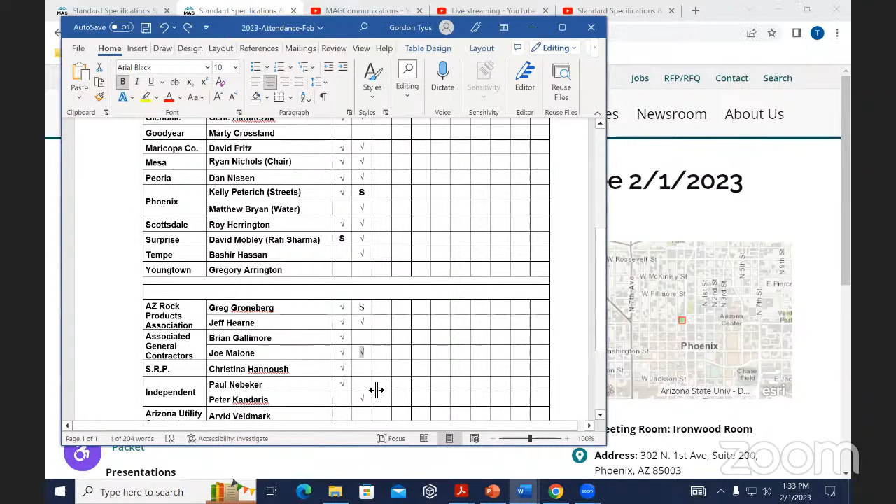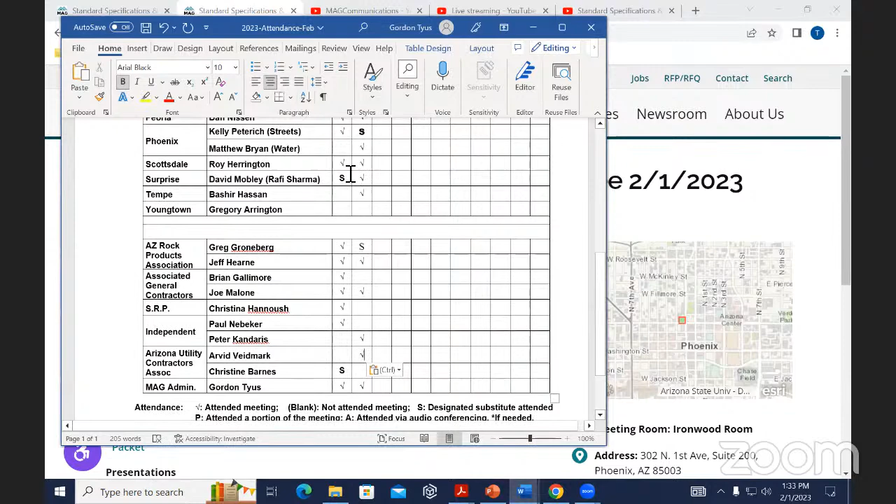Okay. Gordon has the roll call sheet up and shows who is present. If you don't see that your name is checked and it should be, let us know. Hi, this is Arvid Veidmark. Arvid, thank you. 2841. It's a cell phone. Marty Crossland with Goodyear's on as well. Marty.

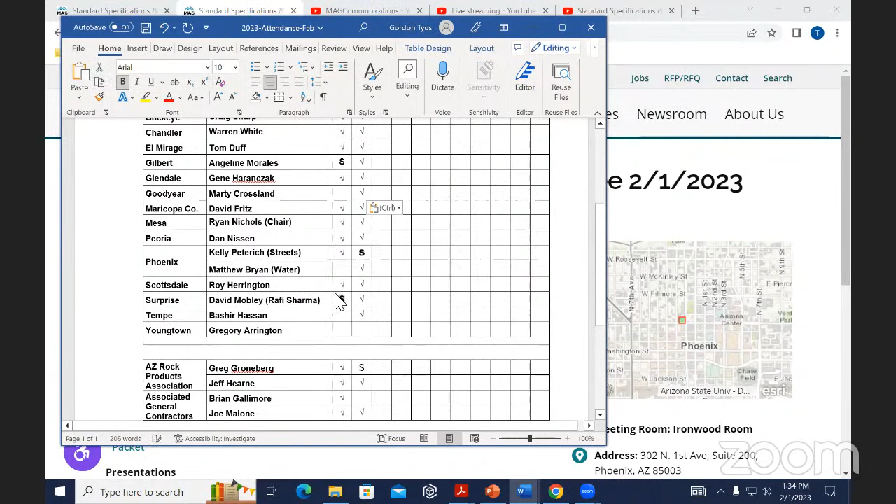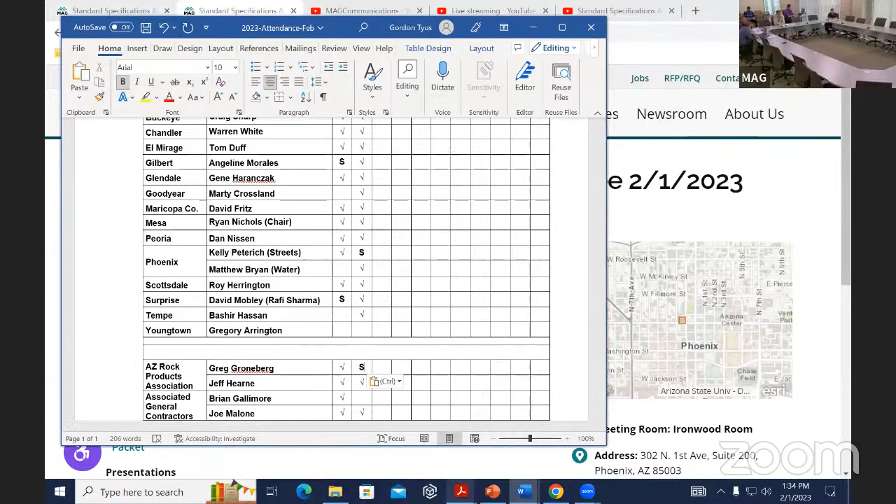Okay. Thank you everyone for joining our meeting today. With that, I don't think we'll go through specifically and do introductions of everybody today like we did last month. However, we do have a few people visiting with us today. We'll ask them if they can give a quick introduction. Hi, my name's Gary Kirk with Cal Portland Cement. Gary also has Sydney Wilson here with him from Cal Portland Cement. Okay. We have Mark Milani and Teresa Coleman also from Drake Cement. Those are the three cement producers in the state of Arizona. Fantastic. And they all came today. That's fantastic. All right. And our support.

Okay. Very good. And today, David Mobley, are you on today? David? Oh, there I am. Can you hear me now? I hear you have some news for us. Yes. So today will be my official last MAG meeting. I am actually retiring from the city of Surprise at the end of the month. Well, congratulations. And from what I understand, you've been on the committee for about 7 years now. Yes. Well, we appreciate all the time that you've had on this committee. That's actually quite a long time, more than most of us.

And appreciate all the time and effort that you've put into the committee, the subcommittee meetings that you've participated in, and of course throughout all these years, all the value you've added to each of the cases, and wanted to recognize that and thank you for that time and service. Well, thank you. It's been a fun time. I'm glad to be a part of it. And Rafi will be taking over full time for the rest of the year. We'll get the paperwork submitted to Gordon for that. But yeah, thank you guys for allowing me to be on it. It was fun. I enjoyed it.

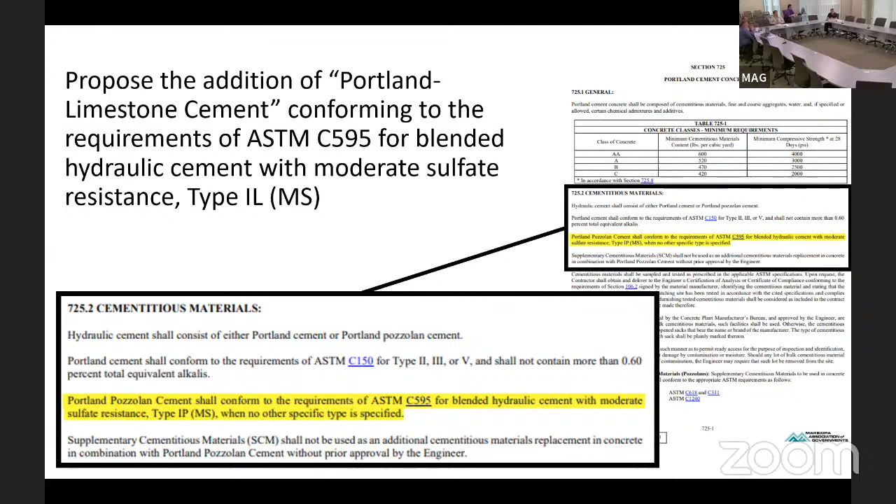So about ASTM C595 cement. ASTM C595 cement is a cement that has been recognized and become very popular lately. There are 4 designations under ASTM C595: an IL interground limestone, an IP interground pozzolan, an IS interground slag, and a 1T, which is a ternary. The ternary is a combination of 2 of the 3 SCMs, either the slag, pozzolan, or limestone. The reason for the popularity is it's a lower CO2 cement, so the carbon footprint is lower due to these replacement levels of clinker with these SCMs, which give you a significantly lower global warming potential on your EPD.

So currently, go back one slide. Currently here, this is what you guys currently accept. You accept a pozzolan Portland cement C595 IP. Our goal here is to get the addition of the IL and the IT. We'll go through all these cements here.

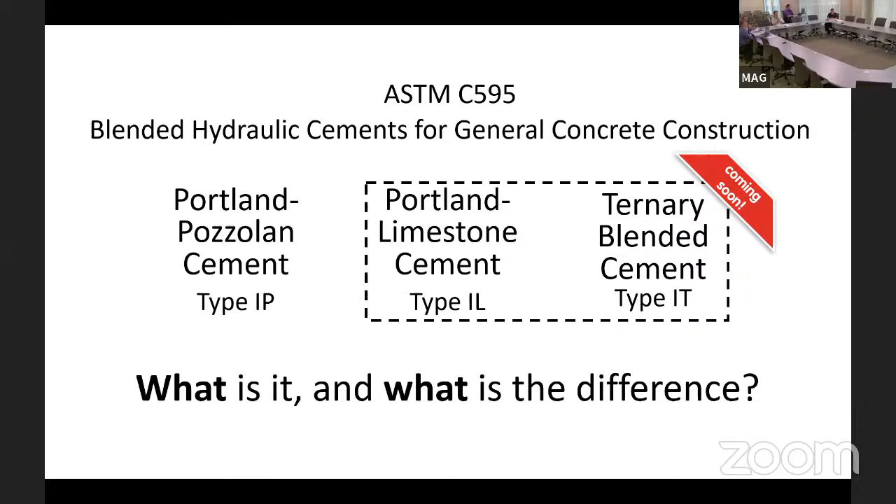So what is a Portland limestone cement? It's a blended cement, ASTM C595. It has a minimum 5% limestone to a maximum 15% limestone. Similar to ASTM C150 cement, which is also known as OPC, but OPC C150 cements have a maximum of 5%. So this just picks up with a higher replacement, giving you that enhanced lower CO2 footprint.

The Portland limestone cement would be considered IL under the C595 designation, and limestone and sulfate resistance are going to be reported on the mill cert. So here's an example: on a mill cert it would be a type IL(13)(HS). The 13 in parentheses would designate the percent limestone in the cement, and the HS would designate it's high sulfate resistant.

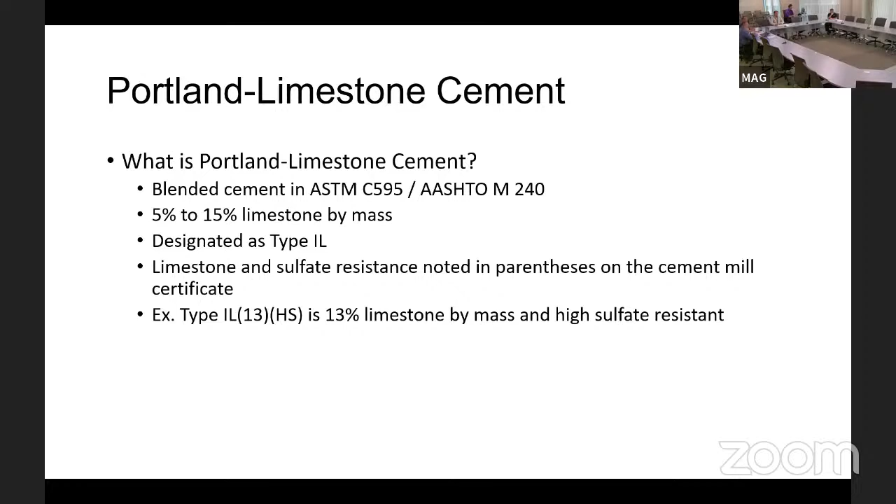So the clinker is the product that comes out of a kiln. You put raw feed that's been targeted for calcium, iron, silica, and alumina into a high burning kiln at 3,000 degrees Fahrenheit.

What happens during that high temperature is you get what they call calcination. So you're releasing carbon dioxide. So the CO2 is going out the stack, and you're turning limestone, calcium carbonate, which has a chemical makeup of CaCO3. When you're shedding the CO2, the carbon dioxide, you're turning CaCO3 into CaO, which is lime.

So this lime is getting molten, connecting, configuring with the other oxides that are inside the kiln, and you're getting your target properties that you need for cement chemistry: tricalcium aluminates, tricalcium silicates. This is what gives you the properties to have a hydraulic cement, so something that's going to react and hydrate when you introduce water to it to begin the stiffening, hardening process of concrete.

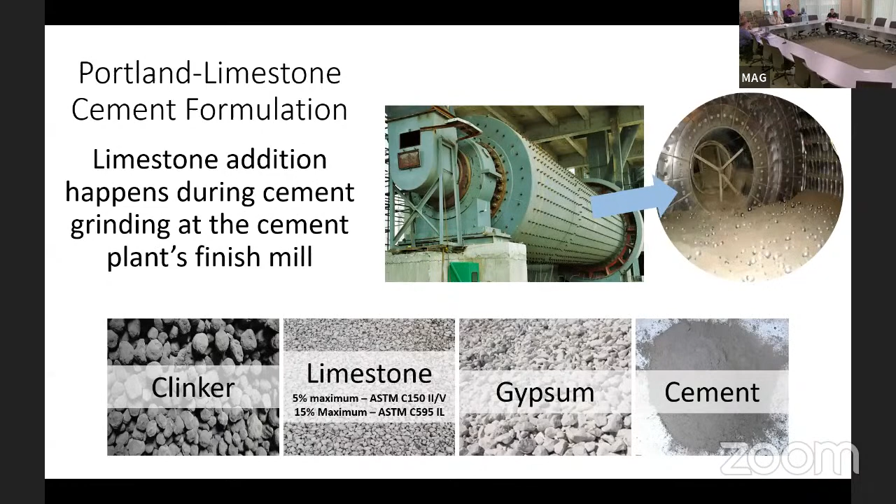A ternary blend is also a C595. It's any combination of the following. You could have two blended pozzolans. Pozzolans could be a natural pozzolan and a fly ash, or you have limestone and pozzolan, pozzolan and slag, limestone and slag. It's designated as the IT. Sulfate resistance and pozzolan, limestone, slag content noted in parentheses are also reported in a mill cert. So an example here is a IT P10 L10 HS. It's basically a IT cement with 10% interground pozzolan, 10% limestone, and it's high sulfate resistant.

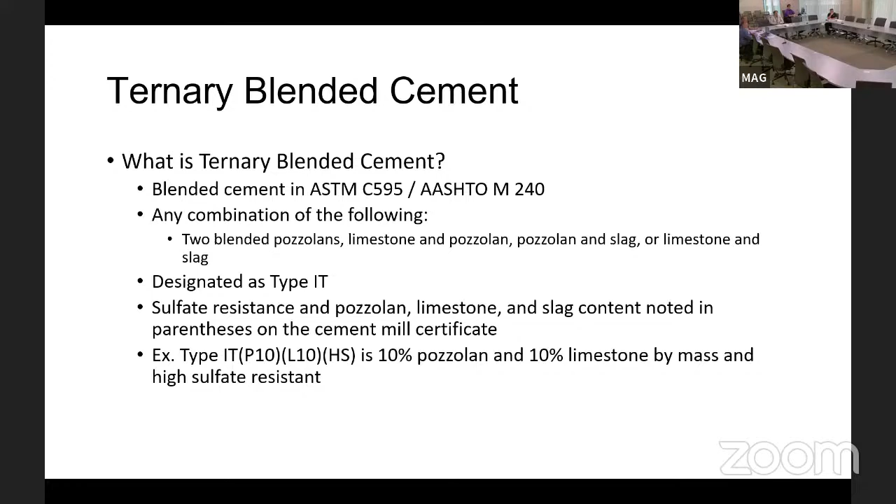Again, back to this slide here, same process, same materials, other than limestone. Now you're introducing either a pozzolan or a slag. Clinker is considered one of the products. So you've got clinker, limestone, and your third would be pozzolan or slag. Gypsum, again, is introduced to regulate set time, and you end up with an end product of cement that performs the same as ASTM C150 II/V or the C595 IL.

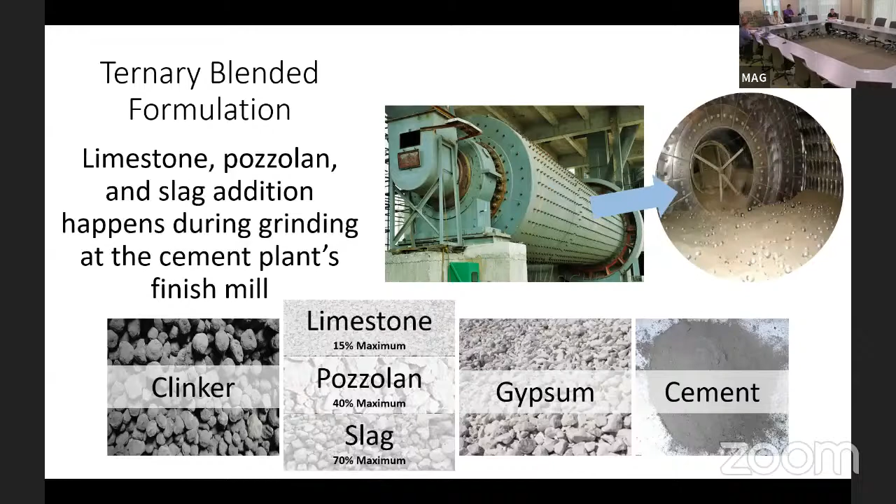Here's a better visual. You have 4 tables here going through. It's all about the clinker factor. You see C150 has the highest percent clinker. And these limestone, pozzolan, and slag are considered what they call SCMs, supplementary cementitious materials. They have lower CO2 content and GWP weight than clinker. So whenever you're reducing your clinker, you're getting a cleaner cement, a lower CO2 carbon footprint.

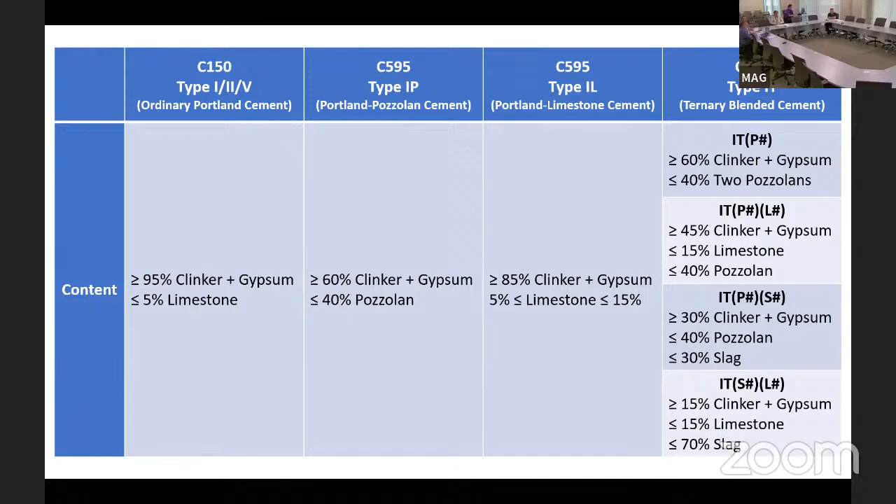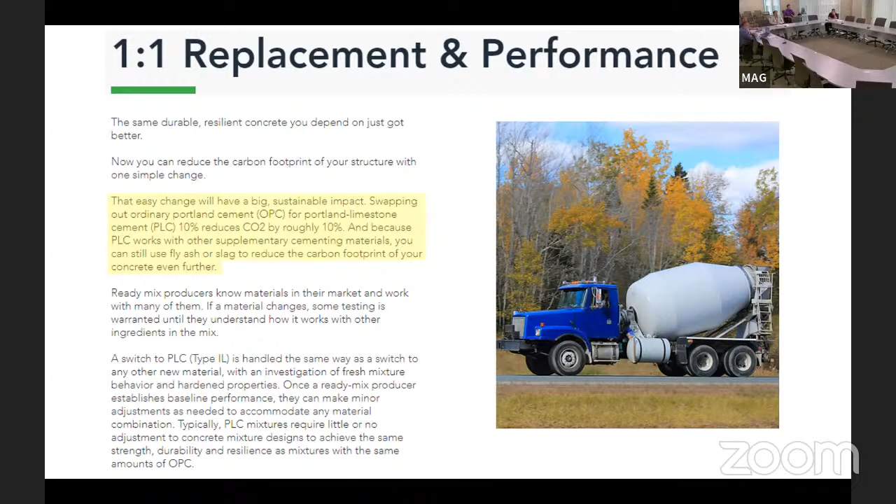Here's a slide from greenercement.com. This slide just reiterates that the performance is comparable on a 1-to-1 basis with ASTM C150 cement. So that would mean on a typical mix design, a pound for pound replacement, and you get comparable performance. Tested and proven. It's been used for years, decades, for paving projects, and we'll get into that with the OSU report, which is a really in-depth deep dive on the comparison with the II/V.

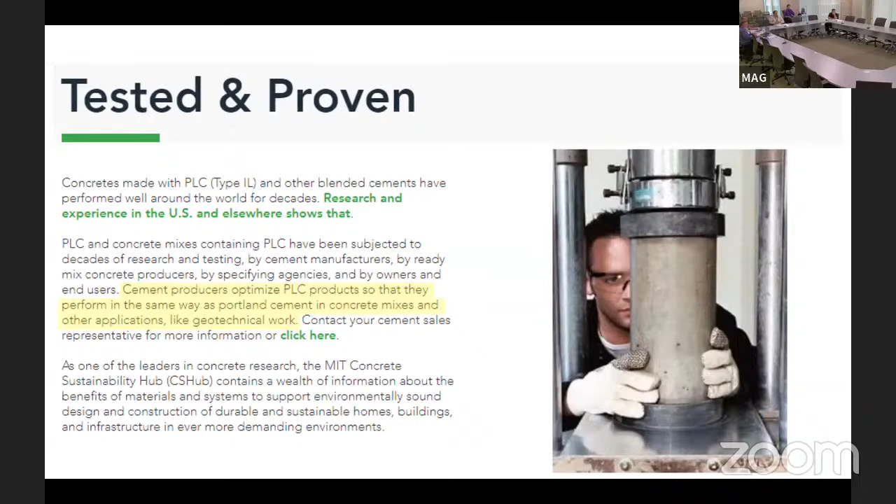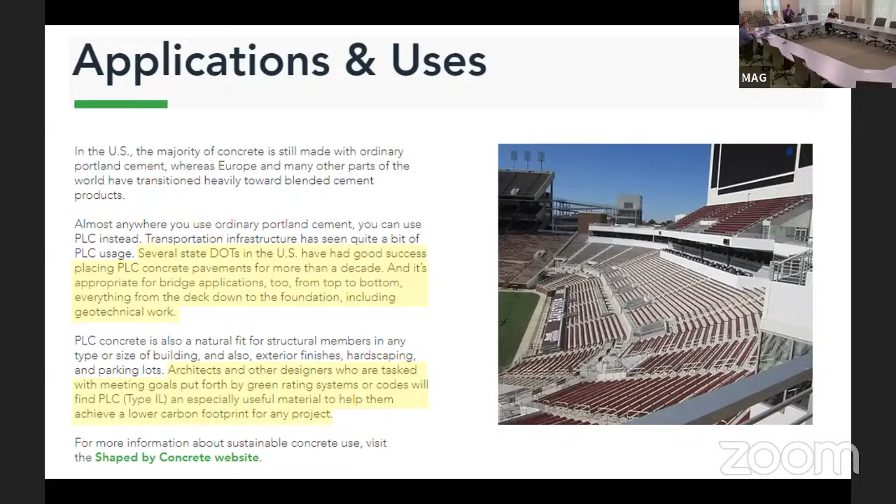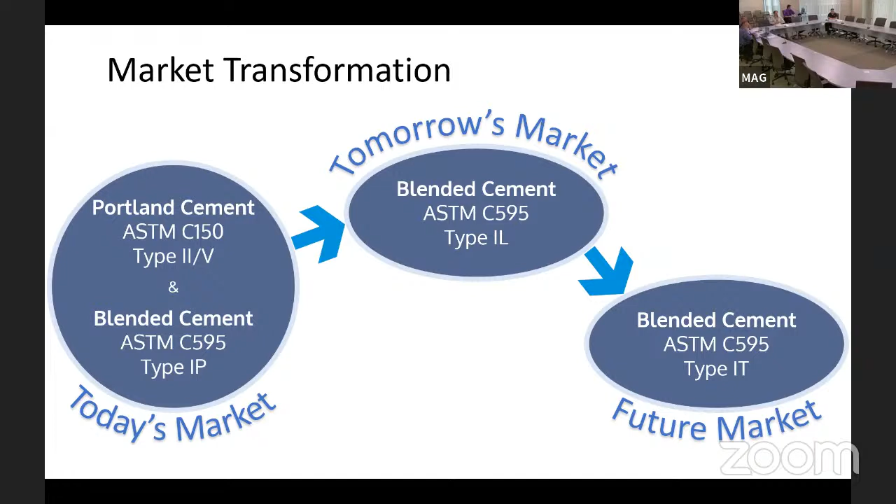Another example of applications and uses: pavement, bridges, foundations, decking, high sulfate, moderate sulfate, slab on grade. It's comparable for any type of application that type II/V is currently used on. Here's a good visual: currently you guys are allowing ASTM C150 type 2 moderate and type 5 high sulfate, as well as a C595 IP cement. Our goal here is to hopefully get the addition of the ASTM C595 type IL cement and the ASTM C595 type IT cement. Comparable performance, lower CO2.

So the research. Caltrans and OSU did a 3-year study on the impact and use of Portland limestone cement on concrete performance in plain and reinforced material. This study was performed by Oregon State University. Dr. Jason Weiss headed the study. Next slide, please.

Some of the topics examined, as I was saying, it's in depth. I think it's 321 pages of research, but they went through ASR, alkali silica reactivity, shrinkage, strength, transport, chlorides, chloride ingress, corrosion, air entrainment, sulfate attack, construction schedules, greenhouse gas emissions. It's just very detailed.

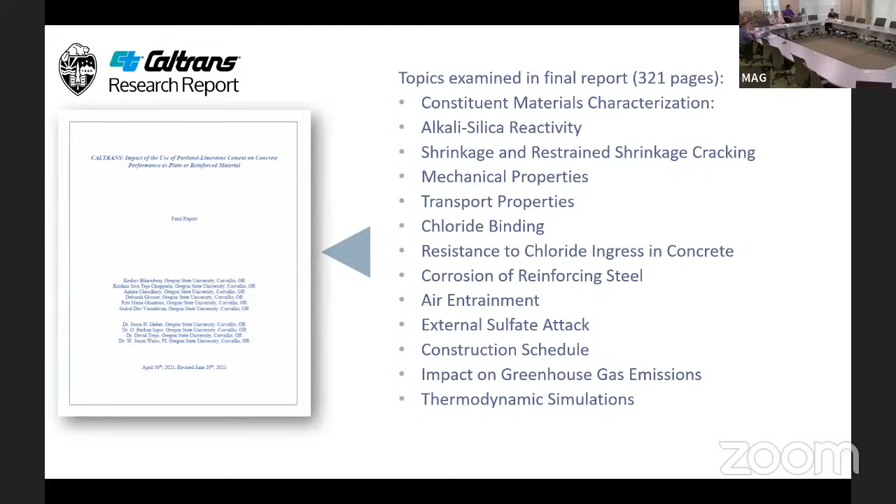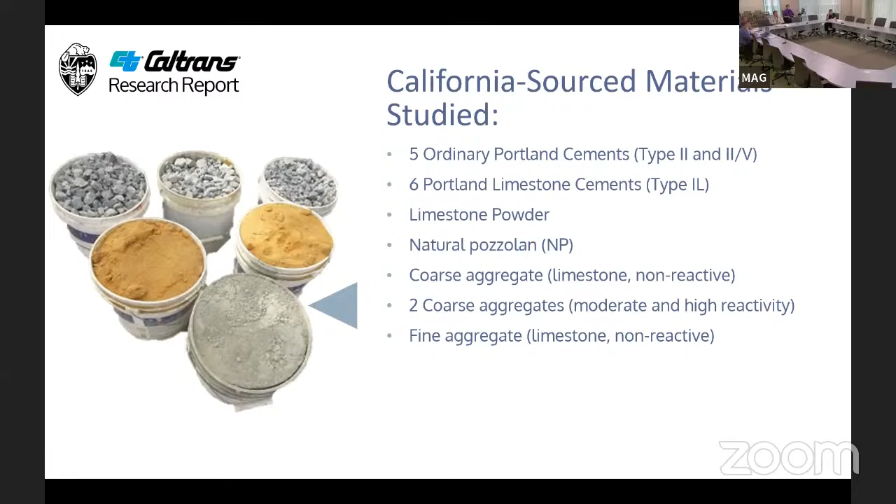All the cements for the Caltrans study were locally sourced out of California. They obtained 5 OPC cements, some type 2, some type 5, 6 PLC cements. I believe they had 2 different levels of limestone replacement, as well as a limestone powder and a natural pozzolan. And they additionally had both coarse and fine aggregates that were moderate and high reactivity and non-reactive. So the full gamut. And they did lots and lots of concrete and a lot of tests.

One of the final takeaways on the report was, when Portland cement is replaced with Portland limestone cement, you get a 10 to 12% average greenhouse gas reduction. And this 10 to 12% greenhouse gas reduction can be further lowered if, say, at a batch plant or a direct job, they're trimming the cement content even lower with further replacement of fly ash or pozzolan or slag.

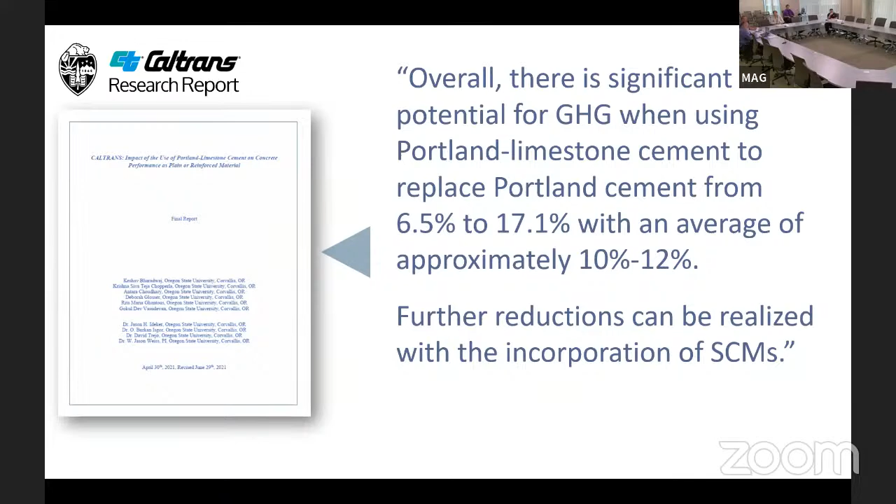Another major finding: PLCs can be used as a direct replacement for OPC. PLC can replace OPC in systems containing SCMs, with synergies with alumina improving performance. They found that the PLC interground limestone, when used with slag as an SCM, had a higher degree of carboaluminate growth, which gave better strengths and less permeability to the concrete. And they recommended that specifications that permit the use of OPC could also permit the use of PLC, again at a 1-to-1 replacement.

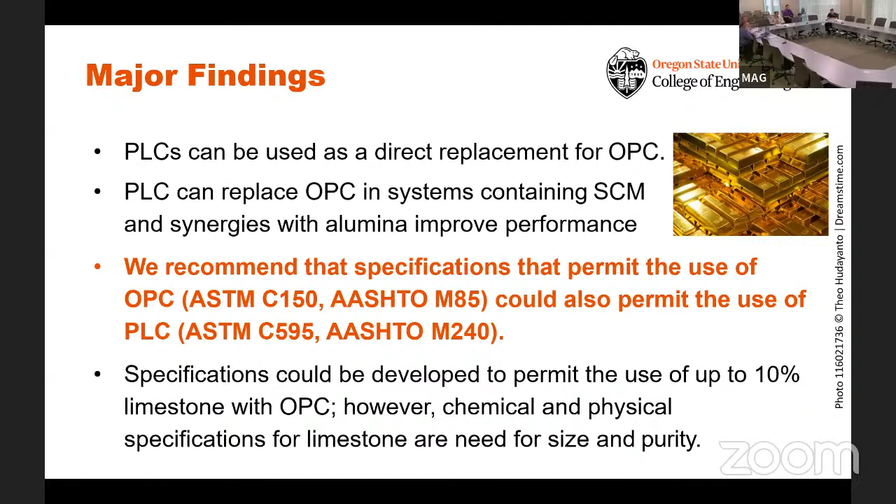So who approves of type 1L cement? Caltrans, after the completion and reporting of the OSU report from Jason Weiss, decided to make a complete shift over to PLC, and Caltrans currently allows for Portland limestone cement on all new projects. And at the time when they did this last year, they allowed for switching over to PLC in the middle of a project. So it was Caltrans, NDOT, and ADOT. They were kind of the holdout here on the West Coast for the last couple years. And this report from Jason Weiss got Caltrans to move the needle for approval.

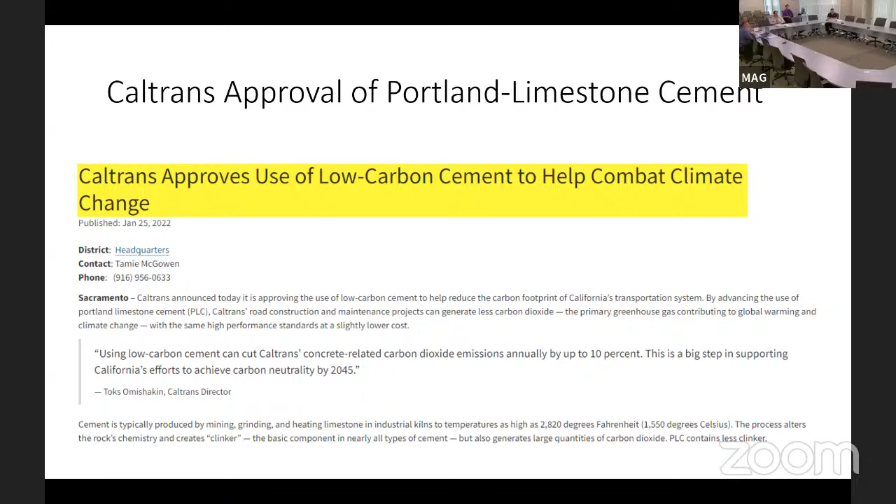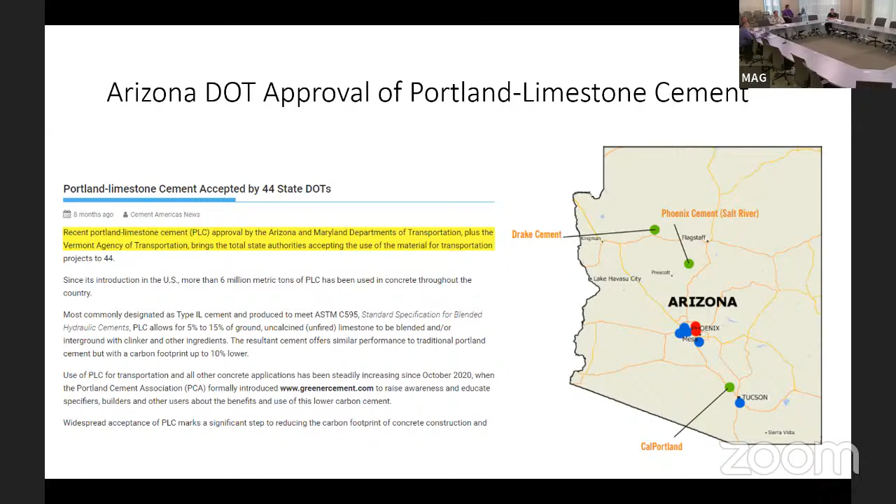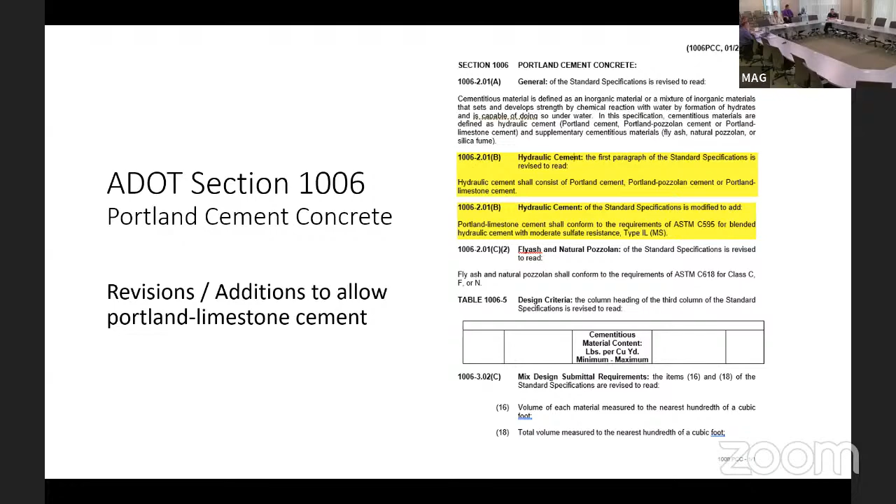Shortly after Caltrans approved, NDOT followed suit and also approved Portland limestone cement. And also shortly after NDOT, ADOT approved. And so ADOT is accepting PLC for all DOT work. And here's a map that shows the geographics of CalPortland, Drake, and SRMG in Arizona. Here's a picture of the ADOT section 1006 Portland cement concrete. You can see the highlighted version there that shows the inclusion now of ASTM C595 1L cement, moderate sulfate. Very similar verbiage to what we're asking for MAG to accept today.

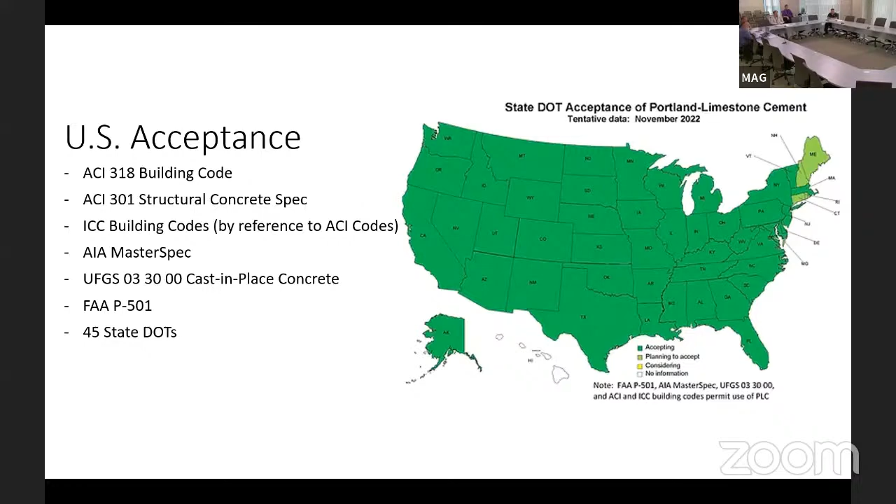Here's U.S. acceptance. Changes have been made to the American Concrete Institute building codes. ACI 318 allows 595 for structural, as well as 301. ICC, AIA, Corps of Engineers, FAA, and 45 of the states currently accept. 4 of the 5 are very close to accepting, all kind of up in the northeast corner.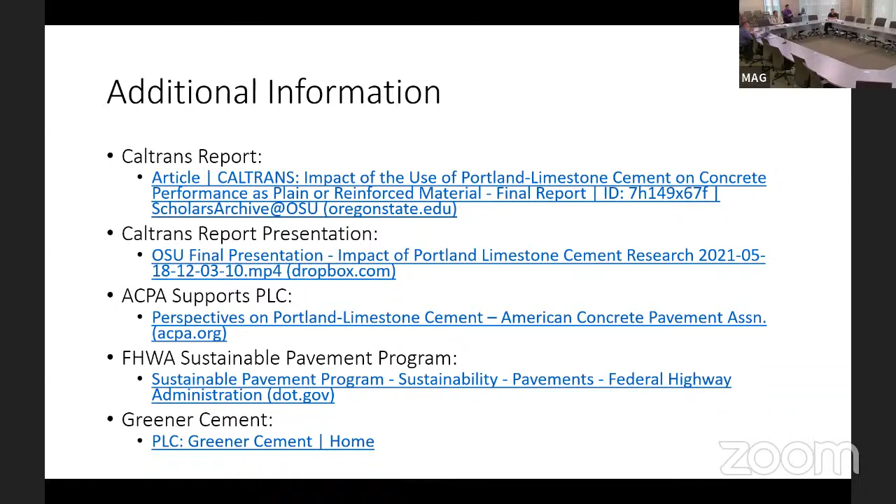Here's a slide that shows some of the information, the Caltrans report, and then the Caltrans presentation, which won't take as much time to read. It's a little condensed. We also had the American Concrete Pavement Association, the Federal Highway Administration, and the Greener Cement website, from which we included some of the slides in the presentation today. That concludes the presentation. Thank you.

Gordon, did we have any questions from raised hands so far? Okay, well, we'll go ahead and open it up here for questions from the committee for this presentation.

Somebody, I've got a lot of questions, but I'm waiting for everyone else. I know other people must have questions. I think it was just a great presentation. It was a great presentation, and I think everyone on here is smarter than I am, so maybe they caught it all, whereas I have to clarify some things. Looks like Dan's got a question.

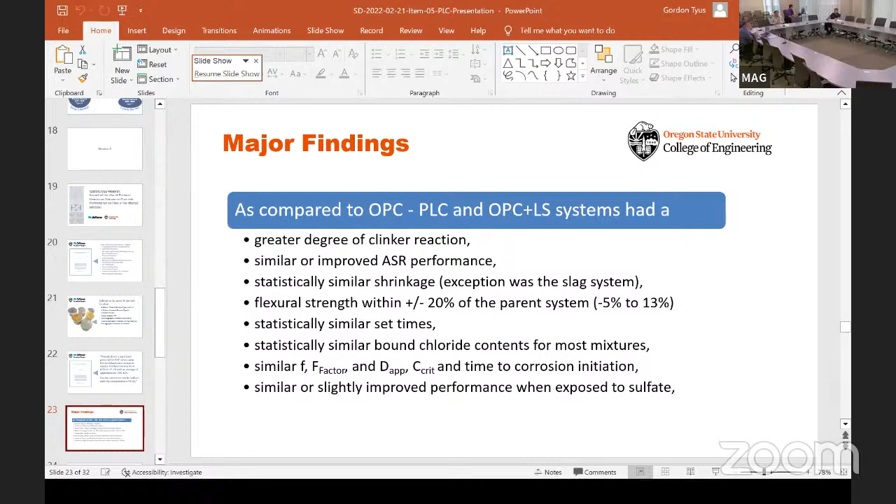Yep. So flexural strength is with paving. It's a beam that is heavily dependent on aggregate more than cement paste. For instance, smooth river rock does not perform well with the flex beam. You need a crushed aggregate to get better adherence, so you don't have that pull out. Flexural strength was plus or minus 20 of the parent system. I'd have to dig into the Caltrans to see if it was plus or minus.

Okay, I was just curious. I'm assuming Caltrans and ADOT have probably taken a pretty close look at this as well, so if there were issues they probably would have raised those. I think this was the one that could have been possibly plus. I know Caltrans requires high replacement of SCMs in addition to PLC and with OPC.

The other thing is the OSU study tested a range of limestone contents, as you can see, from 5 to 13%. So this is a generic statement that incorporates that range of materials. I think you're going to find the vast majority of 1L PLC products will be around that 10% number. It really doesn't make much sense to produce a PLC with only 5 or 6%, because that's C150 cement. That's what we already have. We really need to get to that 10% number before it makes much sense to do it.

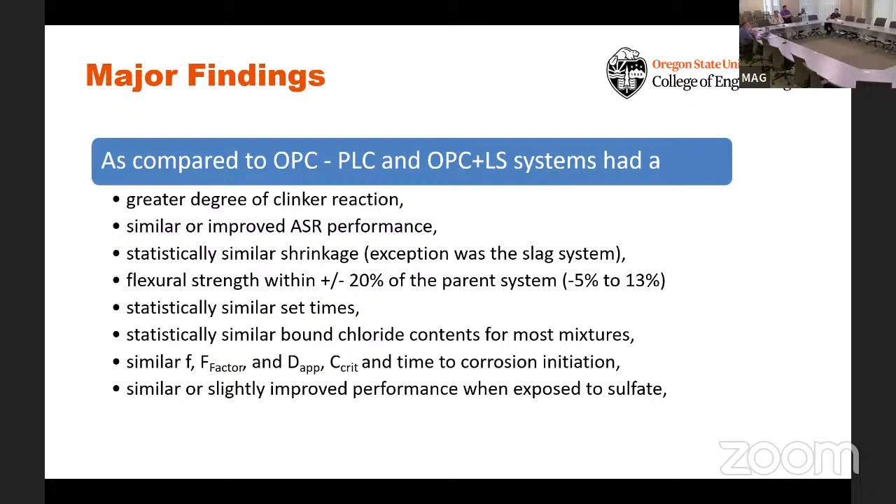So this is a kind of generic statement that would incorporate the larger range. And the studies I've seen from the American Concrete Pavement Association have shown that it gets equal or a little bit better, because of the particle packing scenario, the density you're getting out of the finer ground material. You're filling voids with material rather than leaving those air voids in the materials.

Sure. Yeah, because everything else about it seemed positive. That's why that stood out to me. If the flexural strength was minus 20%, it didn't seem to be in line with everything else. So that was just a curiosity question. Appreciate your time. Thank you.

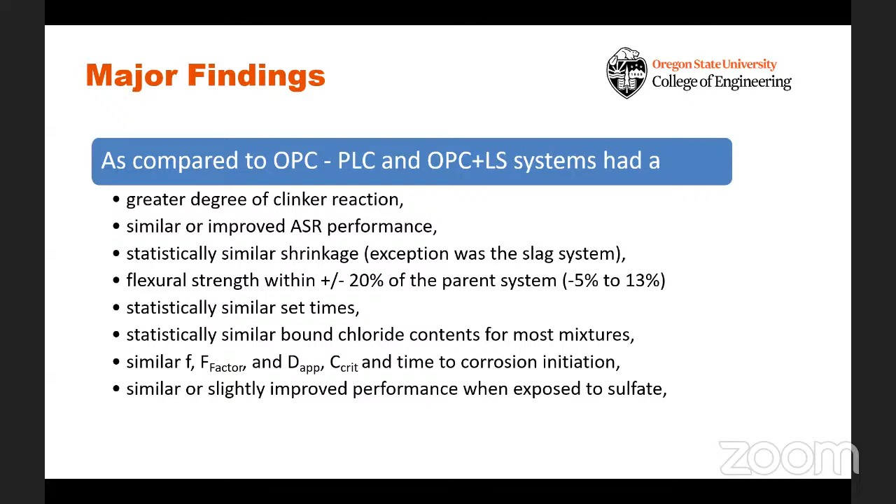Okay, I got a few questions, maybe just one, because I think most of them were answered already. So from what I understood, it's looked at as essentially a 1-for-1 replacement with the standard Portland cement we're using today in our concrete mix design without really changing sulfate resistance, without changing strength, without really any significant property changes.

I think the question was asked earlier if the mix designs would change, and I heard no, but they still might need to tweak them. But my question, just to help me understand: if I took a standard concrete mix design that I have today, for example, City of Mesa has pre-approved mix designs for various producers, and I just swapped out the cement and everything else stayed the same, admixtures, aggregate, water content, would that provide a substitute mix design that would perform equally, or would it still need to be looked at and modified and tweaked?

That's a good question, Ryan. All things being equal, I would say it'll perform the same. Now, having said that, ready mix guys are tweaking their mix designs on a daily basis, reality wise. And that's because of the environments we have in Phoenix, Arizona. We've got 30-degree temperatures at night, 70 degrees during the day. In the summertime, 90 degrees at night, 115 during the day. They're constantly adjusting to get that same performance day in and day out. But all things being equal, side by side, I would say they'll perform.

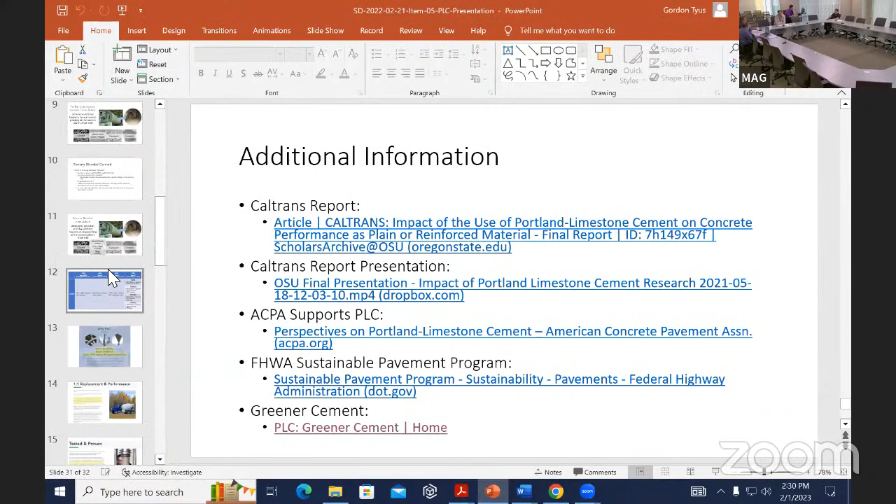My next question is, I saw that on the type 1L in particular, you indicated the maximum limestone content was 15%. Clearly 15% was established for a reason. I'm assuming degradation of performance above 15%, and I guess the question is, if going from 5% to 15% seems to have no negative impacts, what happens after 15% that the performance is no longer found to be acceptable or similar?

There's a graph that's used quite often, with an X and Y axis, and it shows the limestone addition against compressive strength. And the other one is, I believe, a 1202 Coulomb rating for porosity for ingress. When you go up to 4-5% limestone, you get actual strength gain, more strength gain than you do without limestone. And then the opposite is with the porosity.

They cross with the strength. The limestone goes up to about 12.5, 13, and I gotta pull that graph up. But basically it's where they intersect. 15 was the sweet spot where you have the most dense, least permeable concrete, and that's right when the limestone starts to directly hurt the strength. But they do have 20, 30 and 40% limestones in Europe. But we stayed at 15.

This is the beginning, Ryan. This is the beginning. Sure. We will see higher percentages in years to come. It will affect the performance of the cement ultimately. So at 15%, this is where we can have a 1-for-1 swap, but you can still provide a cement at 20 or 30%.

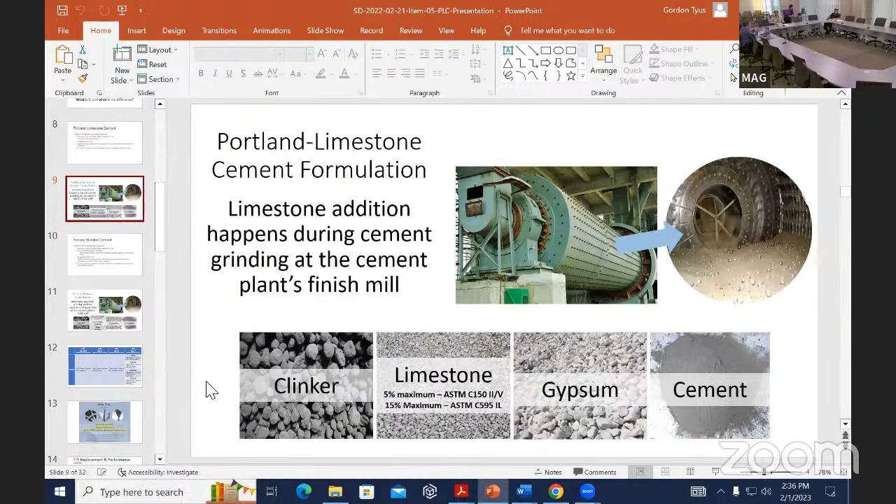A 1T product that would incorporate slag, we're probably not going to see that in the Metro Phoenix area. Availability. But the 1Ts that you will see will incorporate natural pozzolan or fly ash and the interground limestone, because those materials are available right here and we could utilize them.

Now, whether that's at a ready mix plant and those materials are added as standalone single products, or whether that's at a cement plant where those three materials are blended into one product that's used at the ready mix, it's pretty much the same thing.

Yes, slag is a byproduct of steel manufacturing, which is mostly done all in Asia. So they can ship it to some of the ports on the West Coast, but by the time you double handle it, put it in a rail, bring it out to Arizona, and then try to intergrind it at a plant, it's not effective cost-wise. So not today. Who knows what tomorrow brings, right, but not today.

Okay. And Ryan kind of touched on it just a little bit, basically 45 of the states are actually using it now. The upper 5 in the Northeast aren't. Do they have a reason as to why they're not? I'm thinking cold temperature, but then you said they're using it in Canada, so that threw that out. Yeah, I think it might be the Northeast politics. Oh, politics, really?

I know that those things never come into play in the real world, but it's my understanding, our understanding, because we sit in on the national calls that we have of people all over the countryside, Portland Cement Association, who are working on these things, it's our indication from them that it's not because of performance of the product. Just a slow process. Well, change resistant. We understand that very clear here.

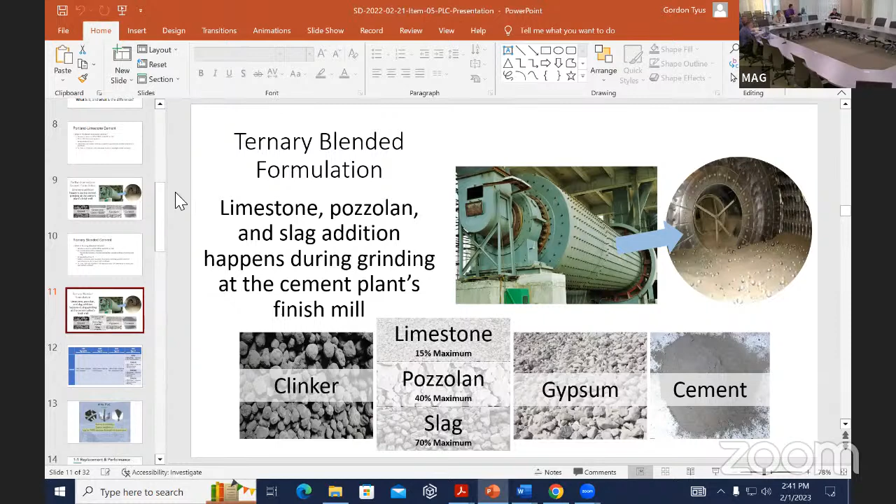Anyone online or questions? I got a quick question, and you probably have answered this already. Is this a proprietary product? No, it's an ASTM standard. That's why in the MAG specifications, we're putting in ASTM C595 requirements. It's not a proprietary product. It has to meet the ASTM standard. So anybody can make it, so the formulation is not a secret?

No. Well, let me say this. Each cement producer is probably going to have their own formulation of the product, but it still has to meet the ASTM standard specification. No, I mean, this specific product that you presented. The formulation of this specific product, can anybody make it? Any cement producer could make it. Okay. Thank you.

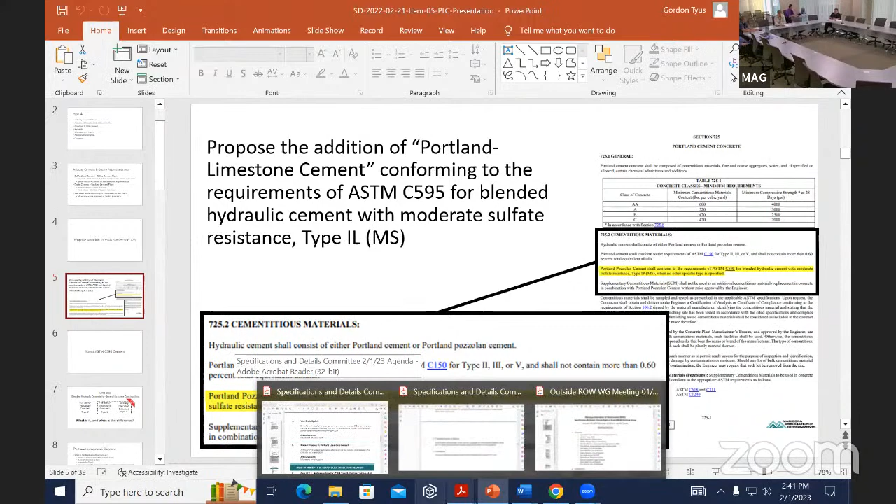Okay. If there's no more questions, we want to thank the whole group here. Gary, right? Yeah, Gary and Jeff in particular. You guys came prepared with a lot of information, and we appreciate your time. Thank you. And Jeff, I'm assuming we'll look forward to having you introduce the case in a future meeting. Yes, Mr. Chairman, we will have,

we'll probably present a similar presentation at the next working group meeting, maybe not as long, because there'll be a different group of people there, other staffs amongst the agencies who will be interested in this too. So we'll do something similar at the next working group meeting, and from that we'll develop the case information and present it to Gordon this month, so it'll be part of the next packet for March 1st. Okay, thank you very much.

Also, if anyone wants to refer back to the presentation, it wasn't included in the packet, but it is posted on the MAG website now. Thank you, Gordon. Okay, let's move to our next agenda item. Agenda item number 6, case 22-15, which is to add new subsection 718.4 solar reflective coatings and add reference to it in section 334. This is a carry forward case from last year.

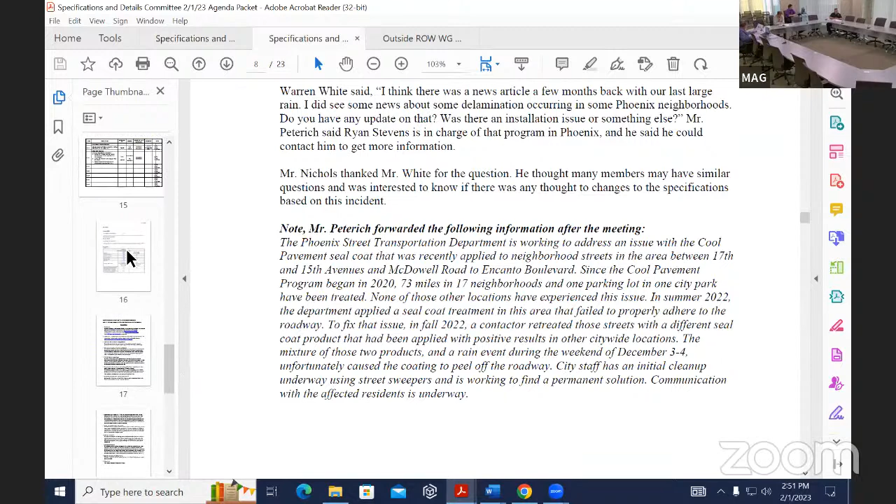We'll move on to agenda item number 7, case 23-01, miscellaneous corrections. We talked about items A and B in our last meeting, and unless there's any questions or comments on those, we can certainly talk about those. But I think item C is a new one for this month, which is to remove reference to the manhole steps in section 605.4,

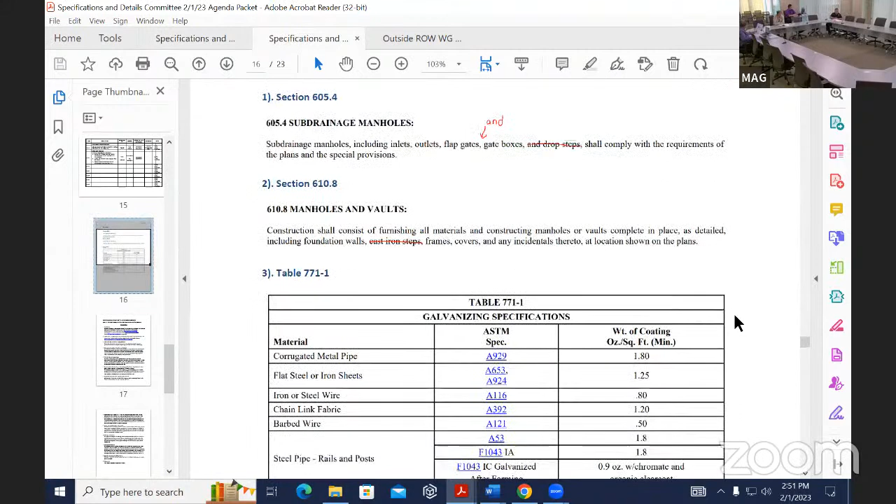610.8, and table 771-1. So a few years back, the MAG specifications were updated so that there are no steps included in sewer manholes any longer. And there were some remnant references in the specifications to steps. So this item of this case would be to remove the associated wording on those. So Gordon's got those up now, and we can look at those if you'd like to do that.

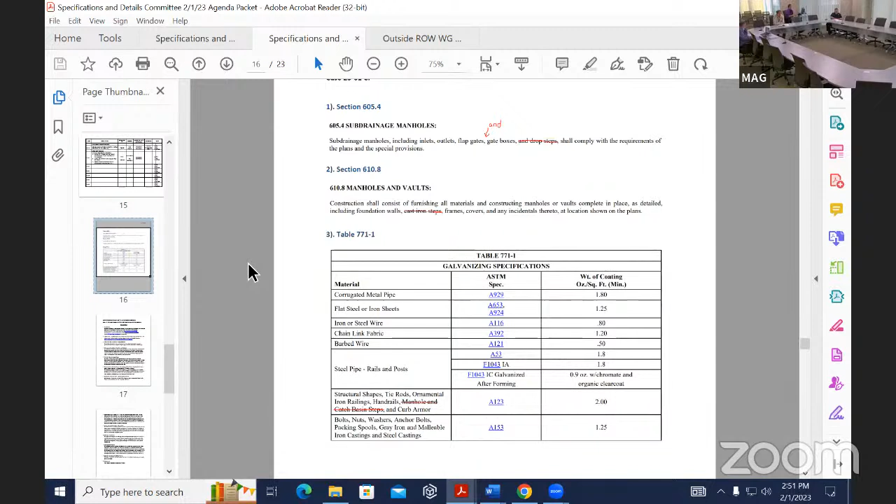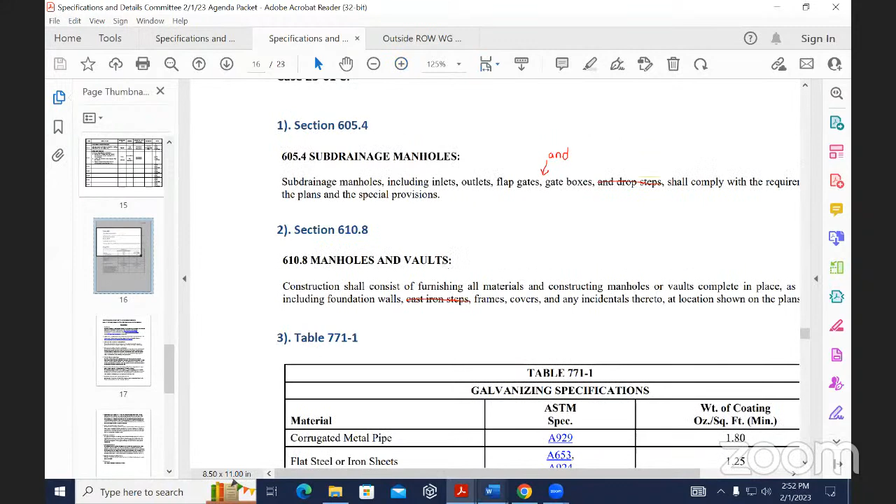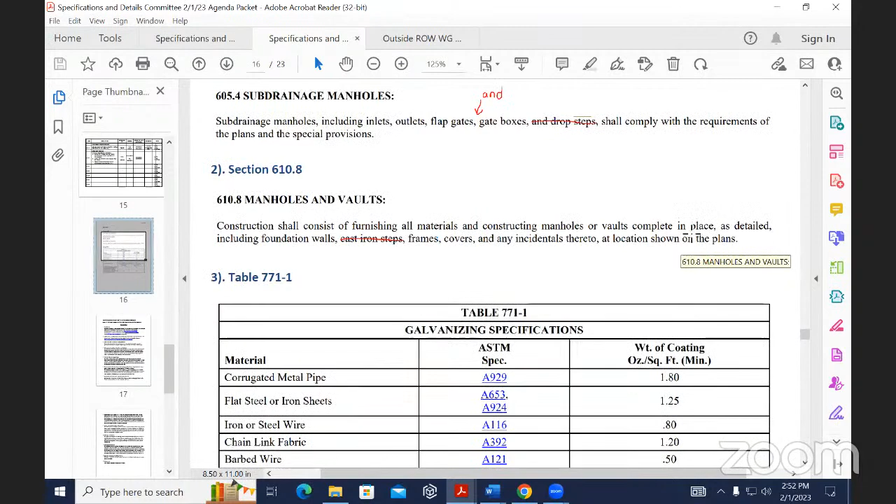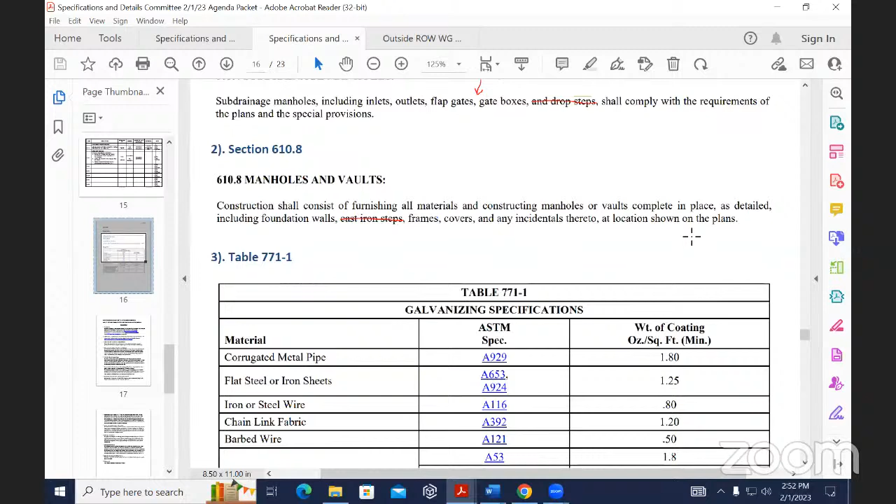This is Warren. The main reason we removed the steps from the sewer manholes was because of the corrosion. Is removing from storm drain more of a safety issue for OSHA and things like that? I'm just trying to get my mind around that one. Obviously the sewer gases are what caused the main issue in a regular sanitary sewer, but the storm, I'm not sure. Have other agencies had issues with the existing steps for maintenance or service?

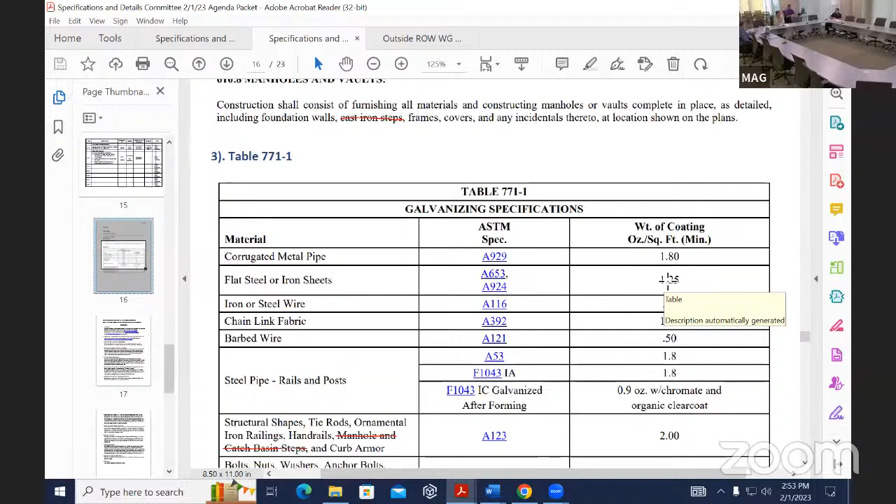Yeah, Warren, it's Craig. When we did this case, the thought was that exact point: it's not really a safe environment for somebody to put all their weight on and crawl down. But as we worked through the case, I believe it was also talked about that contractors don't trust steps any longer. So even if there is a step there, they will put a ladder in the hole. Okay, thanks, Craig. That makes sense. And just to be clear, I don't think that we have steps included in any of the details any longer. So these are just remnant references to steps associated with those manholes.

Warren, this is Arvid. Go ahead, Arvid. And just another observation, another angle on that. It's not legal to be going down in a manhole without a tripod and a body harness and air monitors doing all the checking regardless of the use of the manhole. The steps, as was mentioned earlier, in today's world with all the safety equipment that we put on the individuals going in the manhole, they're almost another safety risk.

So getting them out of the way aids for ladders and the harnesses and the tripods to go in. Anybody that's going down into a manhole without a tripod and a two-person team above ground is already in violation of OSHA. So it's one reason to move away from them. That makes sense. So it's just an archaic reference. I get you. Thank you. Yeah, exactly. It's something I grew up doing, but in today's world, you can't do it anymore. Sounds good to me.

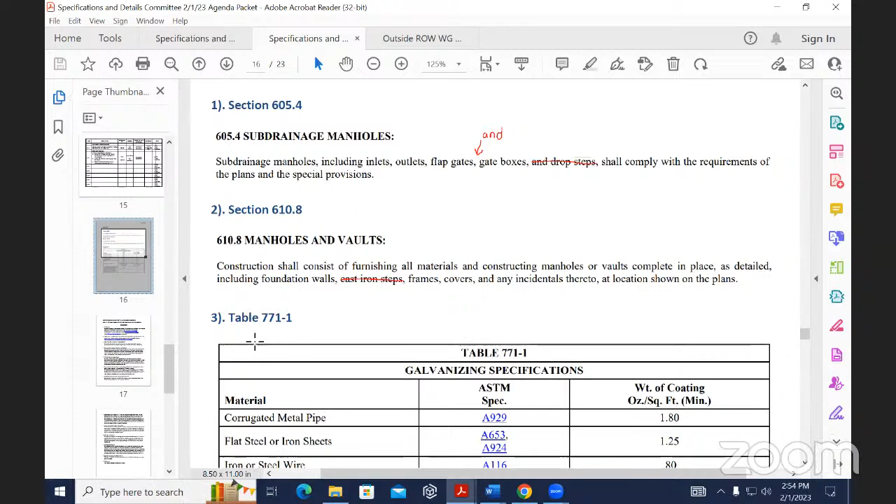Okay. Well, if there's no other questions or comments on this item, the miscellaneous corrections case, we can certainly revisit it next month if you haven't had a chance to review those. They are included there for further review, and we can discuss again in the following month. We'll go ahead and move on to agenda item number 8, potential new cases for 2023. And we already had talked about the potential on the cement. And if there's any other new cases that are ready to be proposed, we can talk about those at this time.

Hey, Ryan, I had just sent an email to Gordon. I don't know, Gordon, if you received that, just a potential case I was going to present to see if there's interest. Hold on, I'm not sure if I can check my email from the room down here, but if not, go ahead and talk about it.

And yeah, it's basically a modification to the standard curb, kind of a hybrid between a single curb and a type A MAG 220 curb. We call it a deepened curb. The streets group has forever wanted to look at a different type of curb than using the single curb on medians, something that's easier to pave up against, easier to mill up against, more consistent grading of the pavement along that matching normal curb and gutter line versus a single curb where you might have variation on the pavement along that curb face.

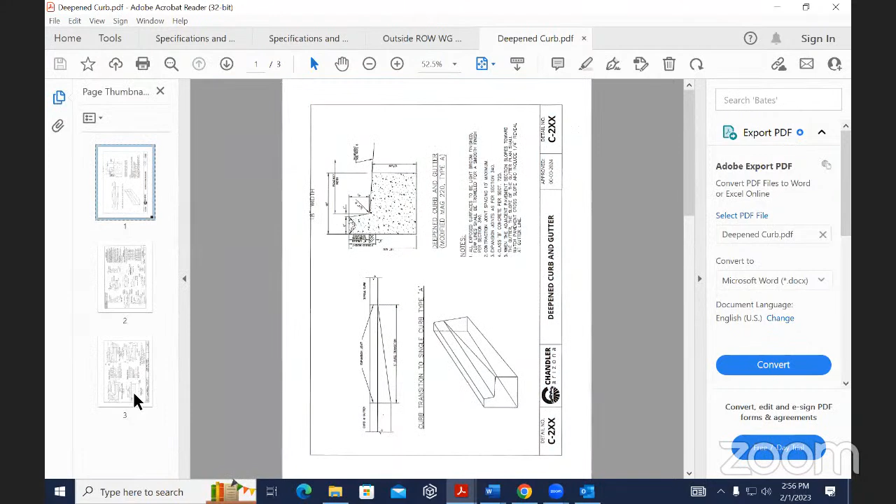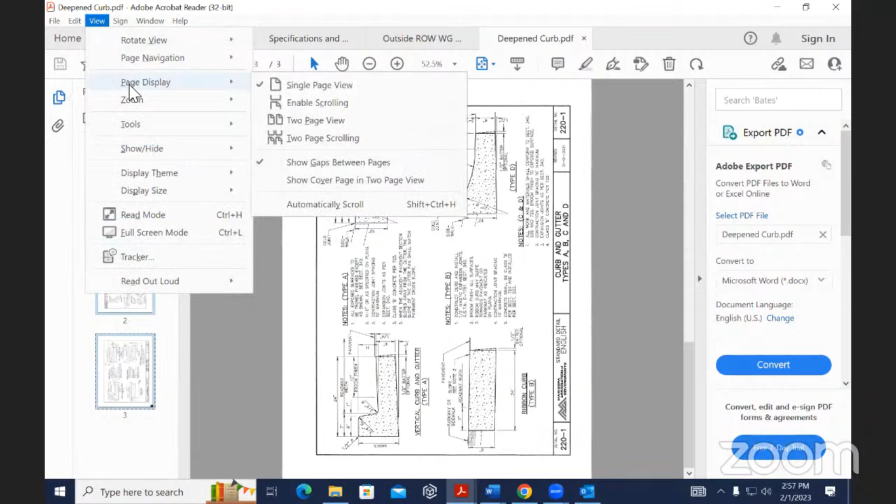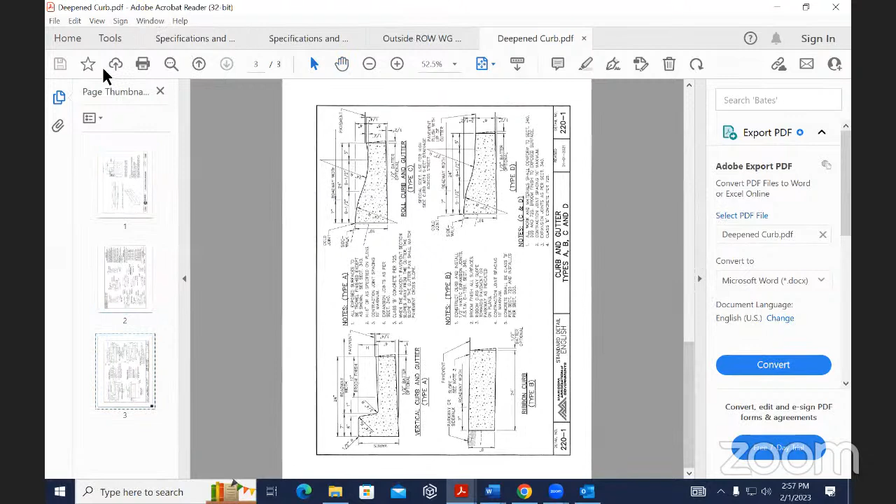I'll give you a second to rotate it. Sorry about that. I should have checked that before I sent it, Gordon. I apologize. Just right click on those. Control Shift Plus. If you select those and right click on them, Gordon, you'll get that option to rotate. That's what I thought. I'm just not getting it. Oh, that's weird. I think it's because it's Reader. Oh, I don't have the full Acrobat on this machine. Well, that's no fun. Oh, here we go. Okay, good. Awesome.

So this would be, like I said, more of a hybrid between a normal single curb, MAG 222, which, as you can see, is a deeper curb. And traditionally, I think people like the deeper single curb along medians because that allows for more depth and more protection from the landscaping, irrigation in the median, and then protecting the subgrade in the pavement section of the road.

So this modification, we've had discussions on different widths. This one here is an 18-inch width. So you have kind of a 6-inch gutter pan area. I believe this is what we're going to be using on our next capital project for Lindsay Road. And I think other agencies have done single curb on medians along with the standard curb as well.

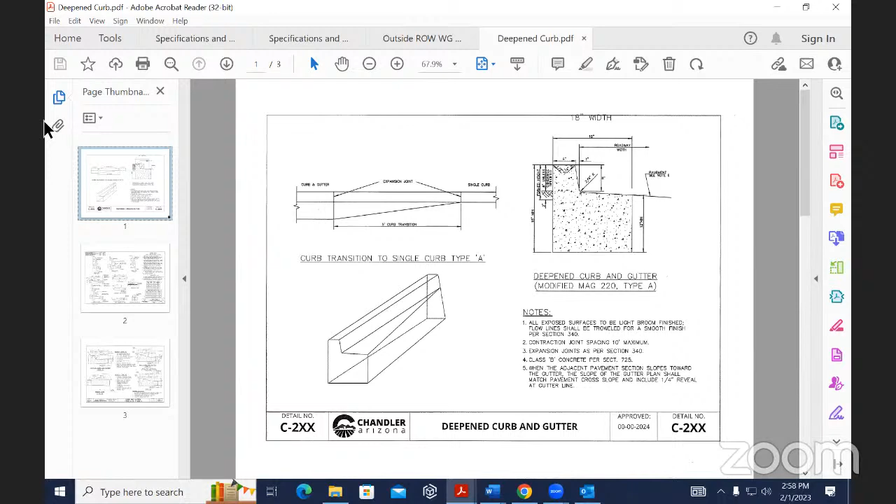But if you go to page 2, up on the upper left, this is the ADOT detail. You can see that single curb type A. Although the geometry is different, you can see how it allows for more of a deepened option there too. 1.5 foot deep type A1. So it's not unusual, I guess, if ADOT's been doing similar types of details.

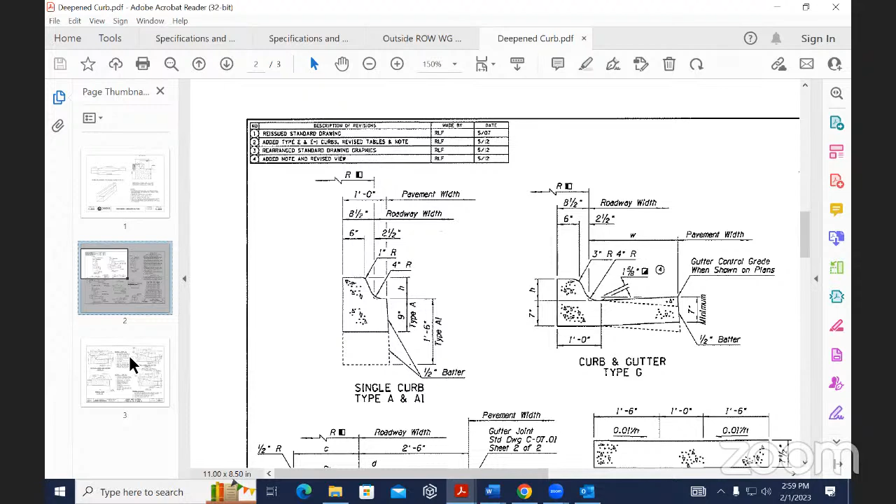So just putting it out there, if there's any interest in other agencies having this option in MAG, I could go that route and add it as another type to 220. So that's the proposal. Okay, thank you, Warren. I don't know if anyone has comments. If you'd like to see this as a proposed case, you're welcome to chime in now.

Okay, no questions or comments on that, Warren. I think it's something that we can definitely look at, and maybe committee members need to go back and see if there's any interest from their agencies in incorporating a new type of curb. It sounds like this one is more intended for medians specifically, although it wouldn't be limited for that use, I'm sure. Maybe there's some conversations that people can have about whether alternate curbs for the medians would be beneficial, and we can revisit that in the coming meeting.

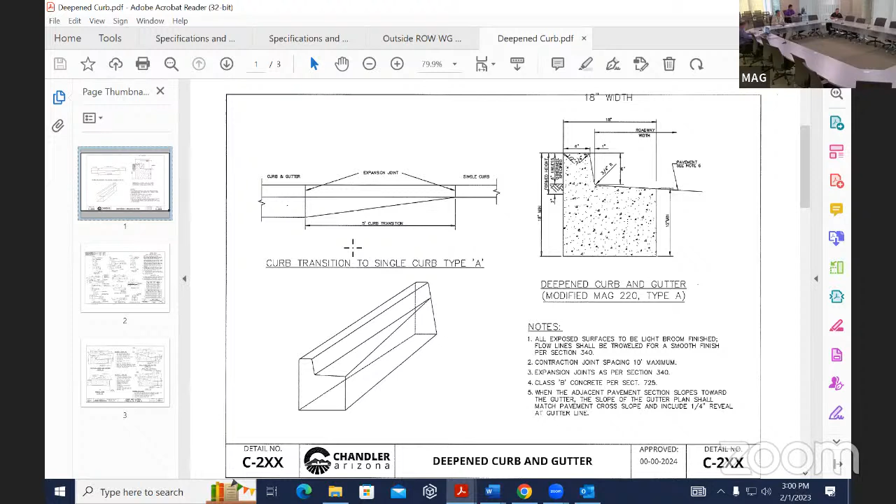Perfect. Thank you, Ryan. Yep, I'll wait for comments. Otherwise, like I said, I'm open to either route. Thank you. Okay, thank you.

And we will go on to working group reports here. And I'm sure that as we go through working group reports, there might be some discussion of other future potential cases. And we can go ahead and do that unless there's any other cases that someone would like to bring up that weren't part of a working group report.

I do have a question from Glendale. Regarding MAG 321.8.5, which is the smoothness specification. Is there anything in the working group at this point for smoothness that addresses the 12-foot straight edge? The reason why this comes up is we're starting to do IRI testing on some of our roads, drivability. We looked through MAG. We don't have any supplements to this for smoothness. We see the 12-foot straight edge, and it's pretty challenging to do on 3 miles of roadway or even a mile of roadway that's 4 lanes wide.

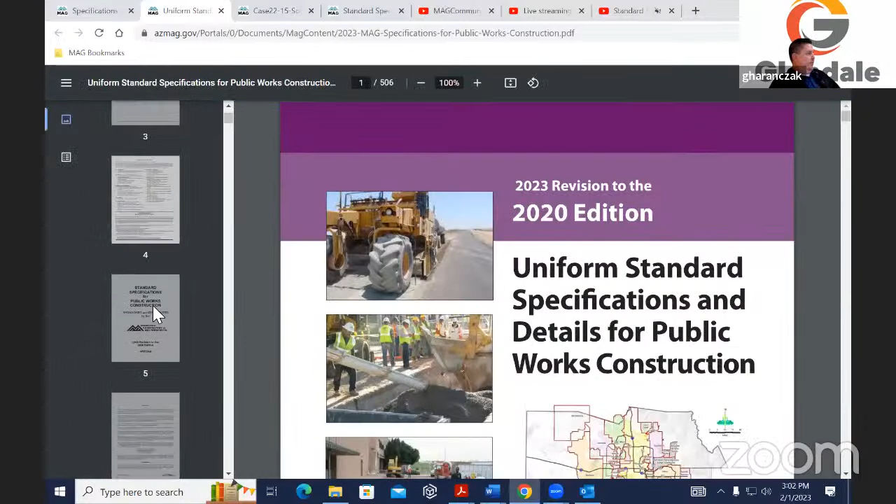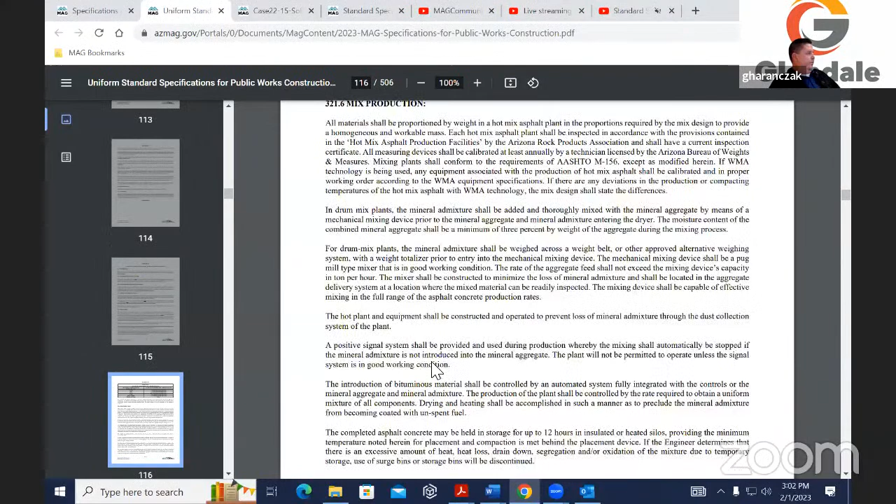So we kind of wondered if any of the other municipalities had a supplement specification. It'd be the 321.8.5. See if anybody else is using IRI or any other methods for profiling or for rideability. I don't know if this is something that should go to the working group or if this is something I should bring up now.

Yeah, so certainly you're welcome to bring this up as a discussion item. Our working group reports will happen here, and then we have a general discussion item. So these types of things can definitely come up as a general discussion. You may get a more targeted audience at a working group, where some members that attend have more familiarity and maybe are a better target audience to ask the question. But certainly this is an appropriate audience also.

I didn't hear anyone comment whether they have a different standard or whatnot. And certainly people are welcome to do that. But yes, it's appropriate to bring up the question here or at the working groups also. Okay. Yeah, rideability is definitely a good topic to discuss. That kind of relates back to that deepened curb that I brought up. That's one of the aspects Streets has brought up, the rideability and looking at rideability at the end of projects. So I think that's a good topic.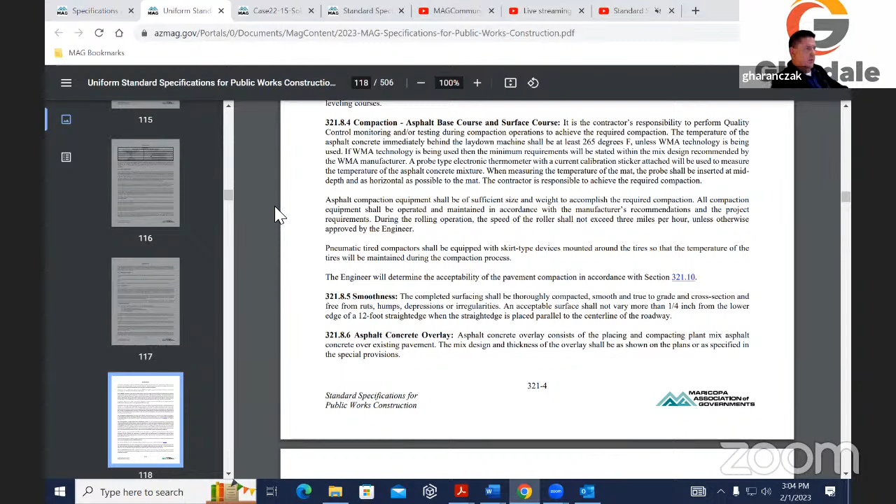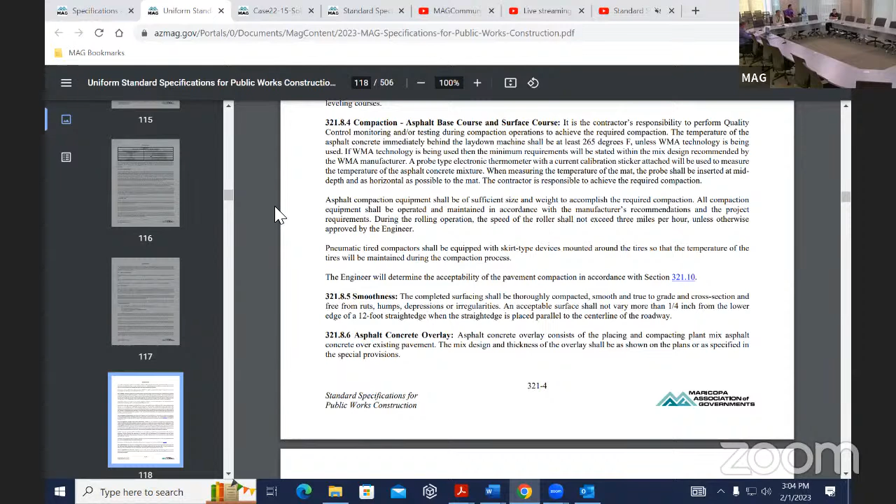Thanks. Okay. So how can I find out if any of the other municipalities have supplements without going through all of their engineering standards, but supplements to smoothness in particular? Yeah, that's a hard question. Essentially, you can ask this committee and everyone can go back if they remember to and are willing to find out what their city does and provide some feedback. But there's no exact way to do that without actually checking city by city what people's standards are. Is that something this team is willing to do?

Yeah, I don't know if you're going to get a whole bunch of responses from everyone right now on that, but certainly I think it's a great request. For those on this committee, the request has been, if you have any standards, if you could send them to Glendale, I'm sure they would appreciate that. If not, we're going to look at adding it into our supplement standards. But I'd hate to do that if the majority of the other municipalities are doing something for rideability. So thank you for the opportunity to bring this up.

Sure. And as up on the screen here, you'll note the different contact information that you're able to access, or reach out to each member of the committee and talk to them individually about what their city may do. Yeah, I just pulled this up from our committee page. There's a link to this list of all the agency supplements. So if you are talking to someone in Avondale or whatever, and you want to see what their specs are, you can go to the links on there to find their supplements.

Yeah, we have a supplement, but I'm almost certain we don't address this specific item. I know we've dealt with it in the past and we've just been using that same MAG spec that you referenced already, the 12-foot straight edge. And there's some subjectivity that goes into that when you're using it. So I applaud your intentions to try to get a more specific spec on this, because I think it could be refined some more.

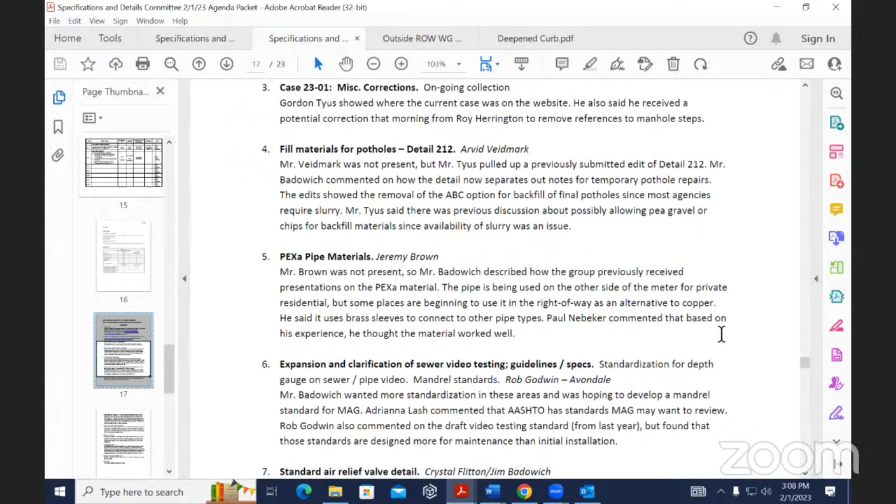The other one we want to maybe expand on is sewer testing for video and getting some more standards with that. There is a really loose national standard that we might look into, try to incorporate that into MAG. We had some representatives from Neenah Foundry looking to maybe present some information on redesigning, refining the manholes and frame and covers. New engineering that might make them, without the ribs, maybe lighter in weight.

The other thing I brought up in our working group was our public works department approached us with an interest in looking into an alternate water pipe that's AWWA approved. It's a C909. Some of you may have heard of it or worked with it already. So we might want to discuss it, and if people want to use it as an alternate, we might want to add that to the 700 section, like we've done with the storm drain pipe in the past. And we again had some general discussion with Mr. Harrington about the manhole steps, which we already got a case in the bloopers, minor adjustments.

So anyways, we hope to get back into these cases and make some progress and bring them forward as a formal case, I should say. Now, our next meeting will be another hybrid meeting, February 21st at 1:30. And that's it.

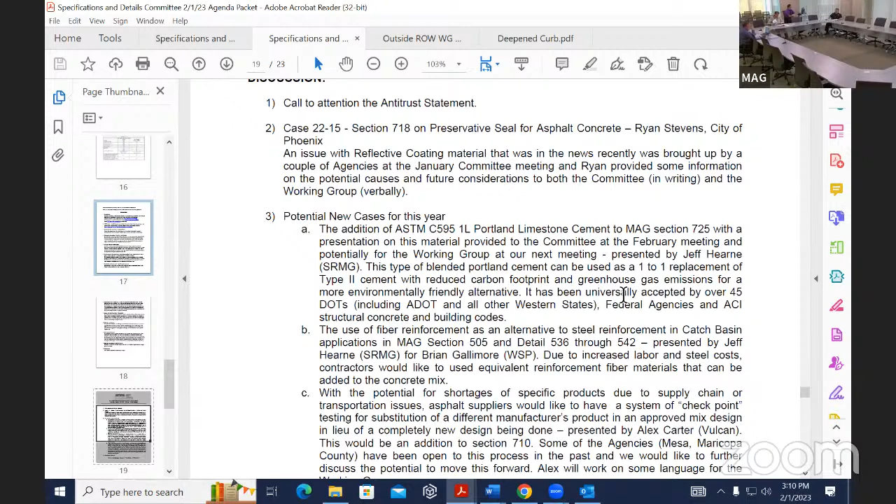We did talk about some potential new cases. Again, item A, we've had the presentation today on the 1L, and as I mentioned earlier, we'll probably do a similar type of presentation to the working group on that product, because it'll be some different individuals.

Item B, there was some conversation too about the use of fiber reinforcement as an alternative to steel in some of the MAG sections. When we redid 725 a couple of years ago, we put a line in on materials for fiber reinforcement and the ASTM spec that it should meet, so that we had something in MAG if people wanted to start using fiber reinforcement in some of the concrete.

Contractors are telling us that they're having difficulty getting the material. They're having difficulty with workmen and installation and those kinds of things. And so we thought that maybe we would pick a relatively minor application and try to see if we could get it introduced into the details and specifications for that. So we just kind of picked catch basins.

Brian Gallimore and I will be working on trying to potentially come up with a case on that to try to move that forward, again with the intention of trying to utilize more of the fiber reinforcement to take the place of wire mesh steel reinforcement and those kinds of things in certain applications.

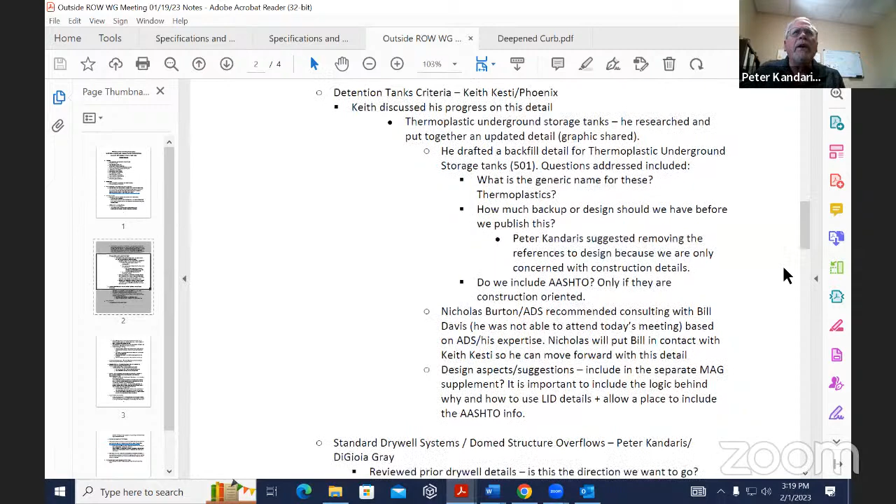Next one we talked about is resurrecting the dry well standards. I pulled some of the ones we worked on a couple years ago. I'm going to try to reach out to some of the dry well vendors and see if we can get them to give us something to where we can identify whether we're looking at things that are too product specific to a vendor, or are they generic enough? And again, ADS said they would start looking around to that, and we'll start putting something together for the domed structure overflows also. So those are the ones that we're actively moving forward. Again, I don't think we're gonna have anything in the next month, maybe 2 months. We're looking down the line to get those in your hands, at least the first ones.

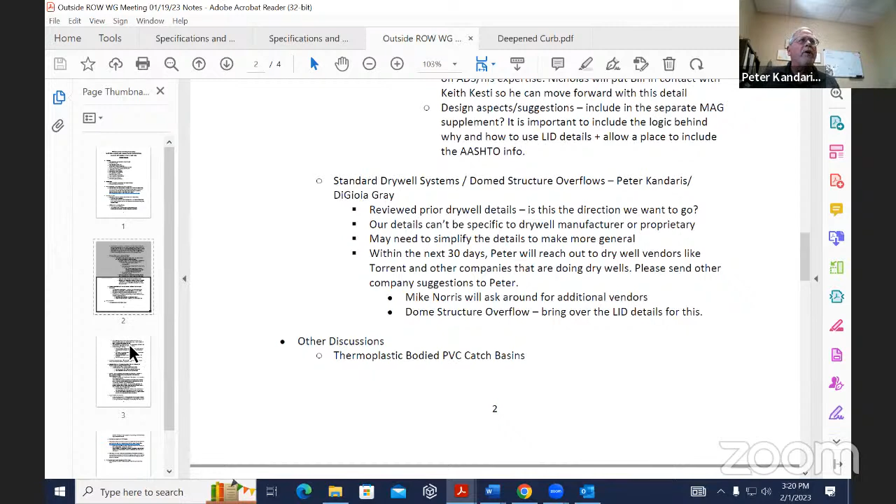Other topics we talked about, and this is the one I really want to start bringing up. I don't want us to go down a rabbit hole and have the committee not want us to be even looking at that. And the main one is the thermoplastic bodied PVC catch basins. The Water and Sewer Group had looked at this, I think, a few years ago, but it was for right-of-way use. Now we're looking at it in terms of outside of right-of-way. And so ADS had brought that forward again as a potential option. And I think, again, we're talking parking lots, not street use. Again, libraries, city buildings, golf courses, things like that, recreational areas.

And so I wanted to get kind of a feel from those who are on the call here right now, if that was something that still was desired. I think we're seeing it, at least on the private side, quite a bit. And I think City of Phoenix mentioned that too. And again, we're talking outside right-of-way. So I wanted to see, is there any opposition to us looking at bringing those back in? Or two, would you like to see something like that brought in? Do you see a need for that? So I'm kind of opening it up to discussion right now with the committee, if anybody's got any opinions toward those.

Hey, Peter, this is Warren. I think the more options, the better, as long as they're viable. That's what we're here for, and we've updated our approved products list recently here. You might want to look at that to see what we've expanded it to for retention systems. But yeah, I'm open to that.

Okay. Yeah, again, I didn't want to start going a direction and find out that there's really not an interest in doing that and have ADS do all that work, and all of a sudden we're putting a halt to it. So if you don't know right away, if you want to send me an email note, that would be good on your druthers one way or the other. But I think we'd like to pursue it. It's a fairly mature technology now compared to when we were looking at it before. I have some concerns over the apron system. So I do think the concrete aprons do need some form of reinforcement, and I'll be pushing that with ADS a little bit. From what I've seen, that's where issues have been, where you get those corner breaks, you get those 90-degree turns, and the crack propagating from those.

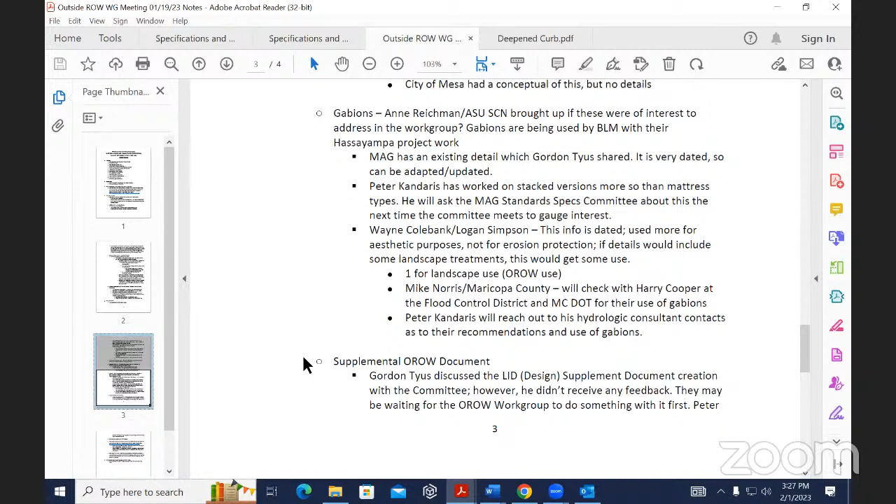All right, good, cool. Peter, one comment on that. I'll send you, it just reminds me, our environmental manager had sent us out some information on some new changes where if a French drain system has a certain depth versus width, then in the future that would have to be registered as a dry well. So yeah, if you could send me that. I wasn't aware that they had started looking at that, that they're considering those dry wells.

They'd really most often been very shallow. The width, it's actually better to have a large width than a small width if you can do that. Makes sense. Yeah, it's nice because you get high void ratio cobble. You put high void ratio cobble in those, and it gives you an area below the ground surface that you're actually storing water in. It helps with vector control immensely, and it does improve percolation.

Well, yes, send me anything you got on that. Although we're not doing design, we do want to make sure we don't have something that violates a standard.

And the last one I wanted to bring up was the idea that we are now actively getting into these supplemental details that are really outside right of way. The landscape group would like to also start looking at outside of right of way landscape stuff in addition to the stuff they worked on. So I think we're to the point we need to have a discussion on what is this book supposed to look like?

We're going to have details this year. We've been able to kind of get them in the existing MAG most of the time, but I think we've run out of ones that can be classified as in the right of way. We're really now into the outside right of way stuff. We got to come up with some format. So maybe we can put this as a discussion item at the next MAG meeting, and we can work through this.